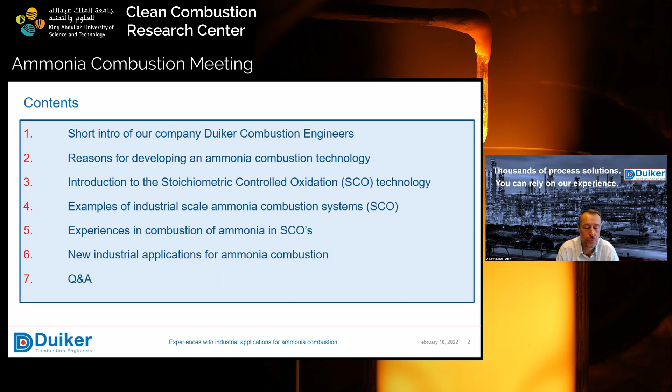Furthermore, I will give you some examples of industrial scale ammonia combustion systems based on our SCO technology, which are already in operation. Based on the SCO units in operation, we can share some of our experiences in combustion of ammonia. And the last thing that I would like to address is to give you some oversight of new industrial applications for ammonia combustion. I'm going to the next slide to give you some idea of Duiker as a company.

Our core business is development, engineering, supply, and servicing of combustion and process equipment. A typical example of a combustion system is in the right corner of the slide. This is what we call the LMV high intensity burner, up till the flanged connection. And from this flanged connection till the tube sheet, you see the part that we recognize as the main reaction furnace. And after the tube sheet, the heat generated from the combustion will be transferred to the water that is surrounding these pipes and will form steam, and that will be collected in a steam drum.

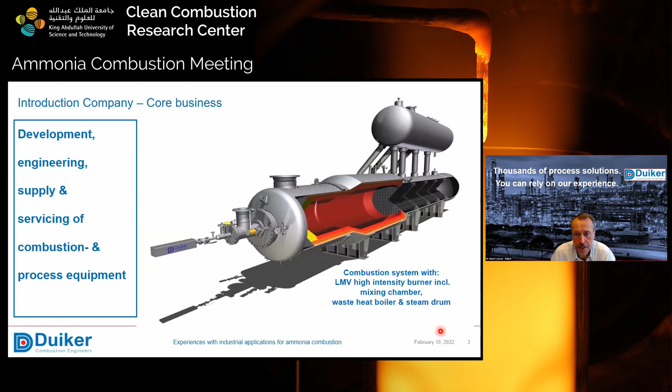The next slide will tell you more about our focuses. Our first pillar of our focus is sulfur recovery solutions. On the picture, you see here one single burner, which is a very large burner. You can see the people standing in front of the burner. The outside diameter of this typical burner for sulfur recovery solutions is 4.8 meters. And the combustion air amount that is used per hour is 120 tons. So it's a very large capacity burner, which is used for sulfur recovery. And I will give you some background later on the sulfur recovery units.

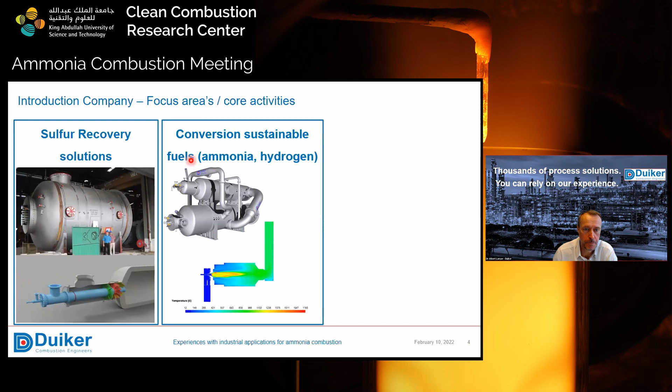In the bottom, there's also a picture of another type of LMV burner, just to show you that there are different types. And this special type normally is applied in revamp situations. The second focus is on the conversion of sustainable fuels. Amongst others, the most famous are, of course, ammonia and hydrogen. This is already a sneak preview of our SCO unit that we have designed and developed for the first customer. And in the bottom, you see a temperature output based on the computational fluid dynamics that we have in-house, and this is particular for the development of hydrogen combustion.

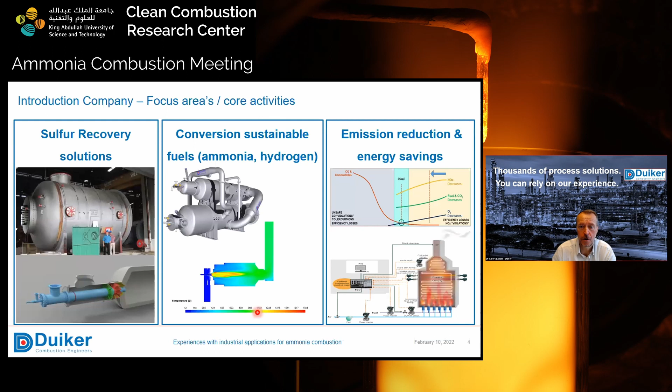Last but not least, we also have a focus on emission reduction and energy savings. And in principle, this is the cheapest and easiest way to decarbonize the industry. The next slide will give you some impression of our locations. This is our main office, located in the Netherlands. In the main office, we do basically the majority of the work in terms of developing, designing, and project management, and also starting field services. Our China office is a support office for sales and project management, as well as first-line services.

We also have our own testing facilities, located behind our office in this building. When you walk around this building and look from the other side, you will see the chimney on the roof of this part of the building. In the front, you see a small test LMV burner bolted on our blue-colored vessel, which is in fact a double-walled water-filled furnace in which we can do all kinds of tests. The order of magnitude of heat we can generate is about 3 to 3.5 megawatts based on natural gas firing.

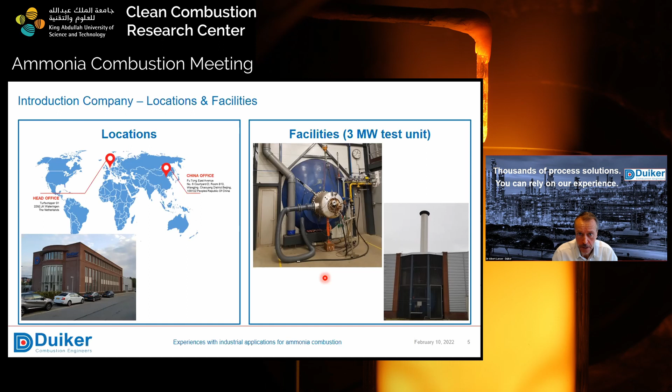So that was in fact a short introduction of our company. In the next slide, I will tell you something about the background for developing an ammonia combustion technology. And to do that, I will tell you something about, well, starting with fossil fuels.

Crude oil contains sulfur and nitrogen, and you do not want to have the sulfur or nitrogen in your final end products. So before you are making diesel or gasoline, a refinery is going to remove these by a so-called hydrodesulfurization process. At the end of the hydrodesulfurization process, you get as a result H2S and ammonia. And in most cases in the refinery, these gases are both further processed in a sulfur recovery unit, which is operating on the so-called Claus process.

And in fact, a sulfur recovery unit reduced the SO2 emissions of an oil refinery to a large extent to prevent the forming of acid rain, which was one of the biggest environmental problems during the 70s of the previous century. If you do not combust the ammonia in the feed gas in a proper way, you may get problems in that the ammonia forms sulfur ammonium salts, and these are able to plug and cause corrosion in further downstream equipment.

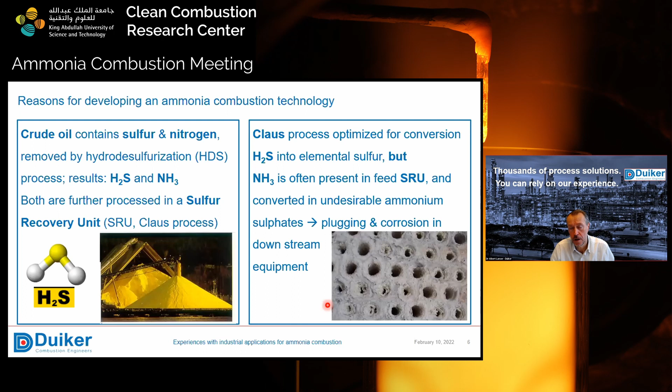So you can imagine that once the feed for a sulfur recovery unit contains considerable amounts of ammonia, the asset owner of the refinery is worried about this fact. For that reason, Duiker has developed a principle to combust all the ammonia whilst maintaining a very low NOx emission profile. One remark up front: the SCO technology is proprietary knowledge, so I cannot reveal too many details, but I will do my best to give you the relevant information so you can understand the principle.

When we look at the SCO principle, it basically consists of two different combustion zones. The first stage is oxygen deficient, so there's a lack of oxygen in the first stage. After this stage, the flue gases go to the second stage, where there's an excess oxygen situation. Before the second combustion step takes place, we add some quench medium in order to reduce the temperature.

The temperature in the first stage depends, of course, on the composition of the ammonia gas. It's not always 100% ammonia. We often see cases where there is some dilution with water, CO2, or hydrocarbons, and even traces of H2S gas. So the temperature here varies between, let's say, 1300 to 1600 degrees. And the temperature that we want to maintain here is somewhere between 800 to 850 degrees C.

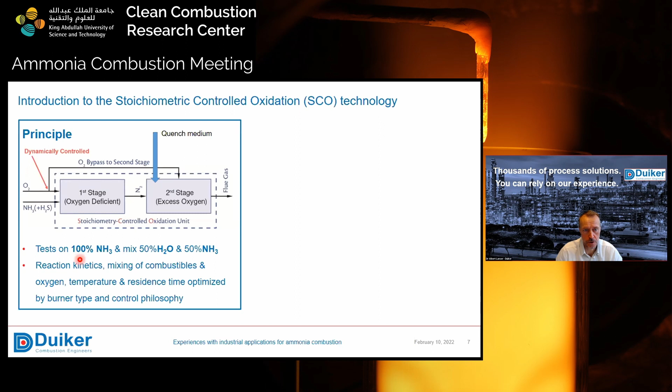In the meantime, we have done tests with 100% ammonia, but also mixes of 50% water and 50% ammonia. Just for the record, the ammonia that I'm talking about is always in the gaseous form, not the liquid form. We already saw a picture of the first SCO unit that we have developed. I talked just about the first stage. Well, in fact, this is what the first stage is about.

This is the LMV mixing burner; the ammonia inlet is on the top, and the combustion air inlet is installed here. After this combustion part, the flue gases will be transported to the second stage, which is the lower part of the vessel. And just for the record, there are two of these piping elbows. The other one, on the other side, is hardly visible, but there are two of these elbows transporting the flue gas from the first stage to the second stage.

In the second stage, we also add combustion air. And in this case, we have used tail gas from the sulfur recovery unit as a quench medium, which also needed to be oxidized in the second stage. So we made a combination of firing ammonia and using the heat from this ammonia to oxidize the tail gas from the sulfur recovery unit. I will show you some more of these details in the next slide, but this is how the equipment looks that forms the first SCO unit that we have developed.

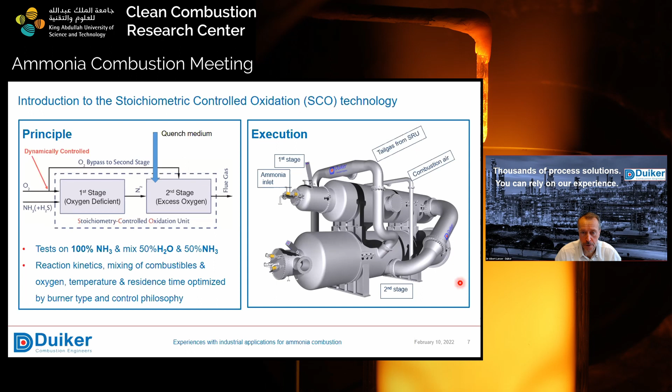After the catalytic section, the tail gas still contains some H2S, which is not allowed to be emitted through the stack. So there is also some tail gas treating unit, which produces some tail gas that only contains very minor parts of H2S, which then will be oxidized in an incinerator and then go to the stack.

Well, this is without the SCO, and the configuration for the sulfur recovery unit with the SCO is a slightly different picture, but here you can see the sulfur recovery unit. Here we have the tail gas treating unit, which is in fact the same function as that. And here we have the tail gas. And in fact, here we have the SCO unit in the integration with the sulfur recovery unit.

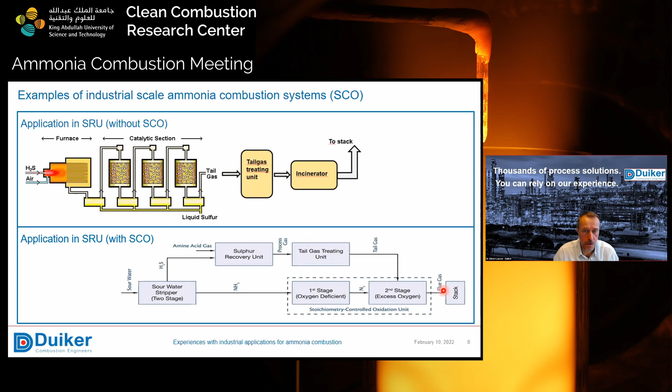How does the equipment look? Well, this is the one that we already saw in the previous slides. The first stage is on top. The second stage is the lower vessel. The reason why these two stages were on top of each other was just a customer requirement. The plot space was too little to have both units in line.

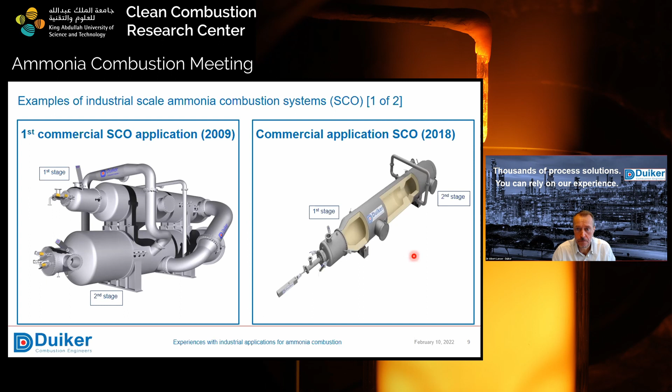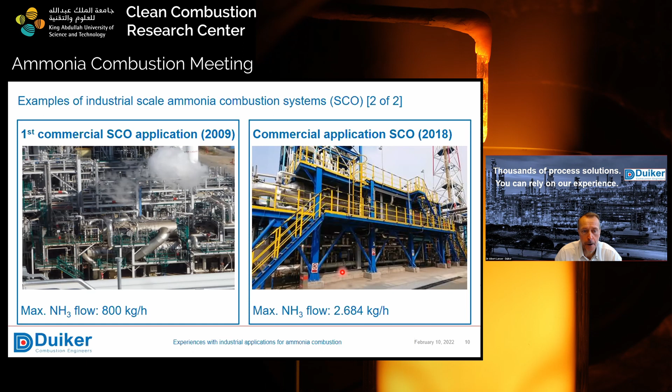The other one, which is in fact the inline vessel that I have shown you on the previous slide, is installed in a refinery in China, and this was slightly bigger. This one has a maximum ammonia flow of 2,684 kilograms per hour. In the meantime, we have supplied 5 industrial commercial SCO applications for the industry, and 3 of them are already in operation. And during operation, we were sometimes in a position to do some comprehensive measurements, which I will use for the next slide.

Because the most important thing that we measured is that the NOx formation in our SCO units measured after the second stage is about 50 to 80 parts per million in volume based upon 3% oxygen in the dry flue gases, so without the water content. It also appeared that the SCO combustion process is a very robust process because it's capable to oxidize ammonia in a variety of compositions in the feed with other chemicals such as water, CO2, hydrocarbons, or even H2S.

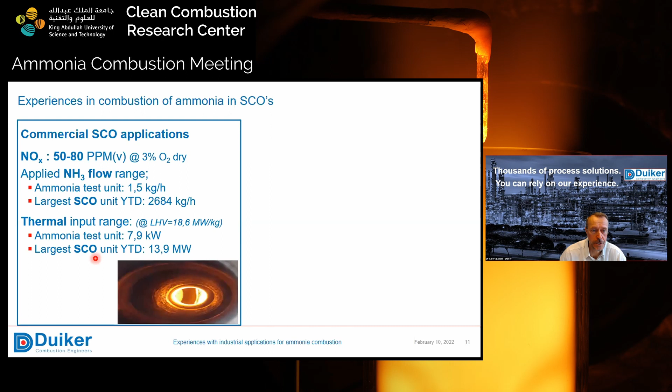The ammonia flow range that we have applied so far: our ammonia test unit was very small. It's only 1.5 kilograms per hour. And the largest SCO unit we supplied today, the one you saw on the previous picture, is 2,684 kilograms per hour, which gives, if you express it in a thermal input range based on the lower heating value of ammonia of 18.6 megajoules per kilogram, 7.9 kilowatts for the ammonia test unit, and for the largest SCO unit till today, 13.9 megawatts.

You have seen the very big LMV burner in one of the first slides, and that means that the SCO combustion process is very scalable. We can even go to 200 megawatts for a single unit. So, to give you some example, to what extent this technology is scalable.

The flame color is a tricky one, because I added a picture of our test furnace, and you see some light eliminating from the sight glass. But when you look at the sight glass, due to the LMV type burner, the mixing is very intense, and you will not recognize the flame. What you see is that there's a refractory lining inside the reactor that's becoming hot, and it's just radiating some light. If there would be any color, we should say something like yellowish, but it's not really a flame you can distinguish when you look to the sight glass.

We have also done new research for an SCO application. We did tests with ammonia-rich gas, where the H2S content was quite high, in consultation with one of the larger oil companies. The purpose of the test was to demonstrate the performance of the SCO technology based on gas flow, which were in fact sour water stripper gas streams, a typical feed stream to sulfur recovery units containing water, H2S, and ammonia.

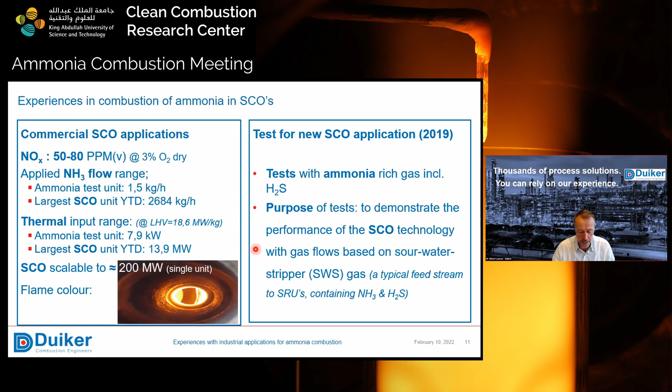We have a high intensity SCO burner, but also an SCO reactor furnace. The stoichiometry is actively controlled both in the first as well as in the second stage, and it's not a fixed value, it's a dynamic value. In this case, the quench medium was steam, and we also used air for the oxidizing part. The SCO flue gas in this test configuration also contained SO2, so it needed to go to a capture installation, because it was not allowed to be emitted directly into the environment.

We have done test runs with 20 to 50% ammonia and 50 to 80% H2S. The NOx emissions that we measured during these tests were in a range of 55 to 60 parts per million, based on 2% oxygen in the wet flue gases. There was some very small content of water. So this was the test that we did to show the robustness of the SCO technology when there were large contaminations of H2S in the gas.

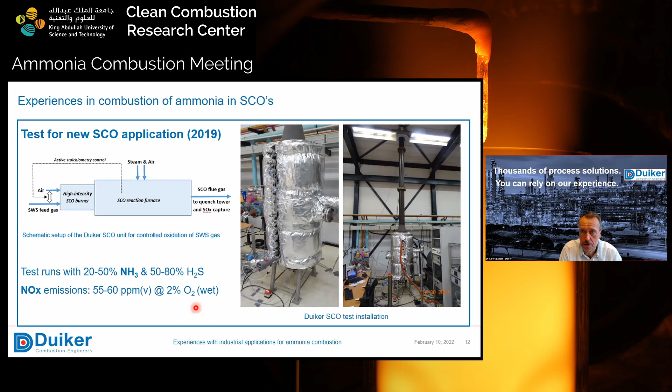Next slide, I will show you some new developments. One of the SCO applications we are looking at right now is a green ammonia fired steam generator. This is just a schematic overview, but it gives you some idea how we can use it.

We make use of heat exchangers integrated in the SCO system to, for instance, warm up boiler feed water and transfer it into steam. And even that steam could be converted to superheated steam in a much higher temperature field in the first stage of the SCO combustion. So here you can use the green ammonia just as a fuel to turn water into steam.

Another example is the so-called ammonia cracker. An ammonia cracker is used to crack the ammonia through an ammonia cracking system into pure hydrogen, and here we use the ammonia as the energy for the cracking process itself. The ammonia throughput that the Duiker ammonia cracker can handle starts from 2 tons per hour till world scale needs, because it's scalable to very large quantities.

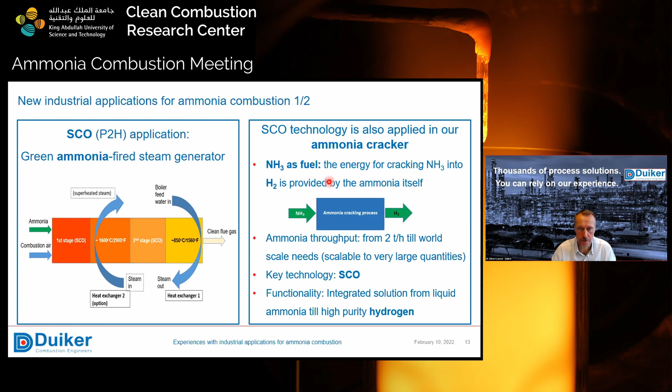The key technology that we use in our ammonia cracking process is our SCO technology. It's a large functionality because it's an integrated solution from liquid ammonia to high purity hydrogen that comes out of the process. To give some more details about this black box, I show you the next slide, which is of course also some proprietary information, so it's not very detailed, but once you get the ammonia here, it's considered like a black box process.

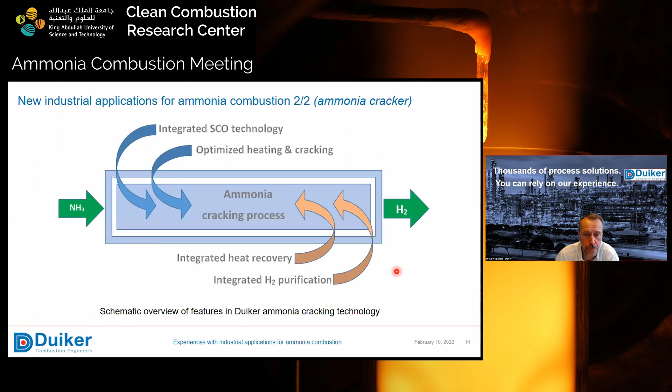We have an integrated SCO technology inside our ammonia cracking process. The heating and cracking is optimized, and also the heat recovery. The ammonia generates heat, and it is very efficiently used inside this cracking process. And at the end, the purification of the hydrogen is also integrated in our ammonia cracking process, and it's even possible to supply pure hydrogen for fuel cell quality.

I'm coming to the end of my presentation. Our motto is thousands of process solutions. You can rely on our experience, because we have already supplied more than 2,000 combustion process solutions worldwide.